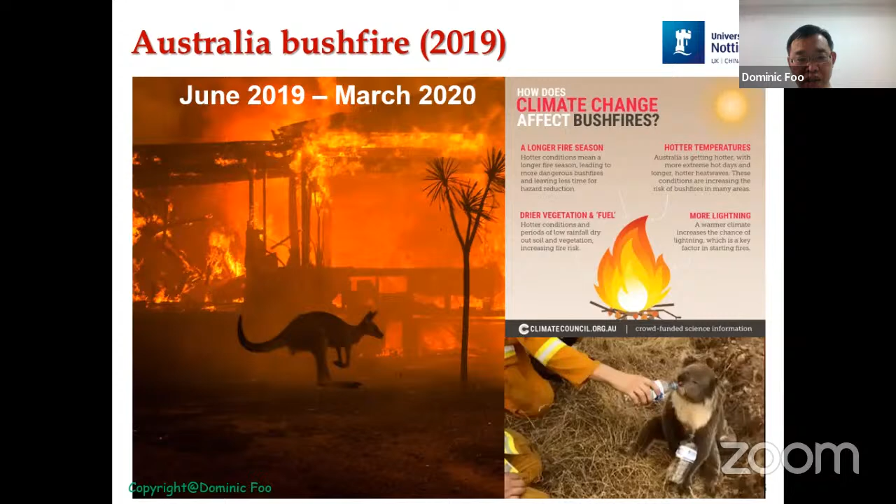The country that is not too far from us, Australia, encountered some bushfires in recent years. Bushfire is not something rare in Australia, it's quite common. The only thing is that in the last 3 years, their bushfires are getting more and more serious and covering more land area. For instance, in 2019, about 46 million acres of land burned, destroying more than 3,000 homes and more than 30 people died.

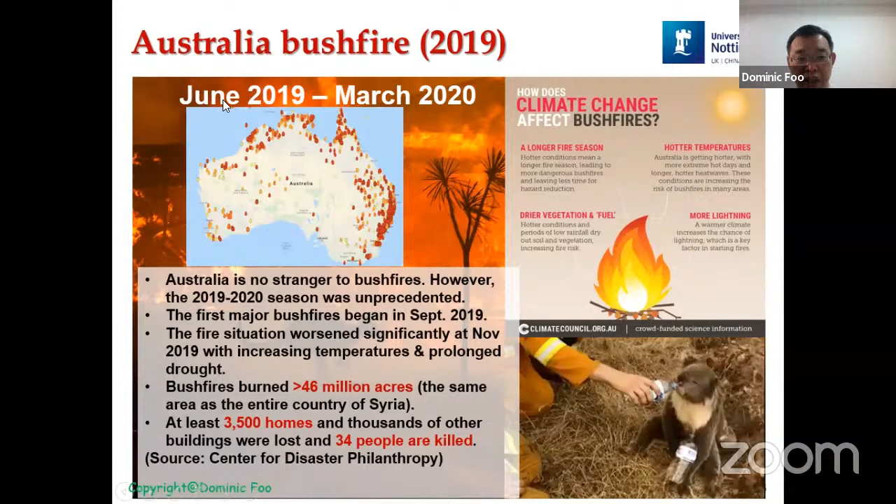It lasts for quite a long time, you can see the duration. Eventually the fire was put off because of heavy rain, but once they put off the fire, the rain causes a flood. You probably also realize that different parts of Australia are facing flood problems in the past 2-3 years, getting more serious.

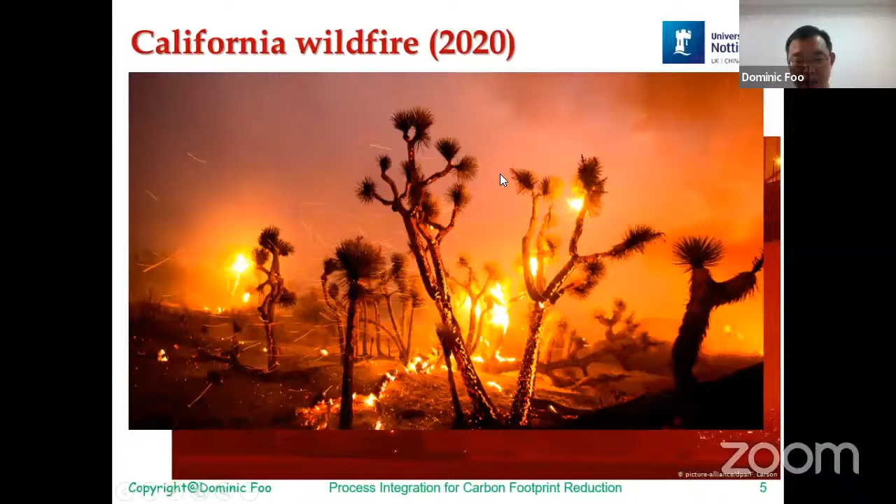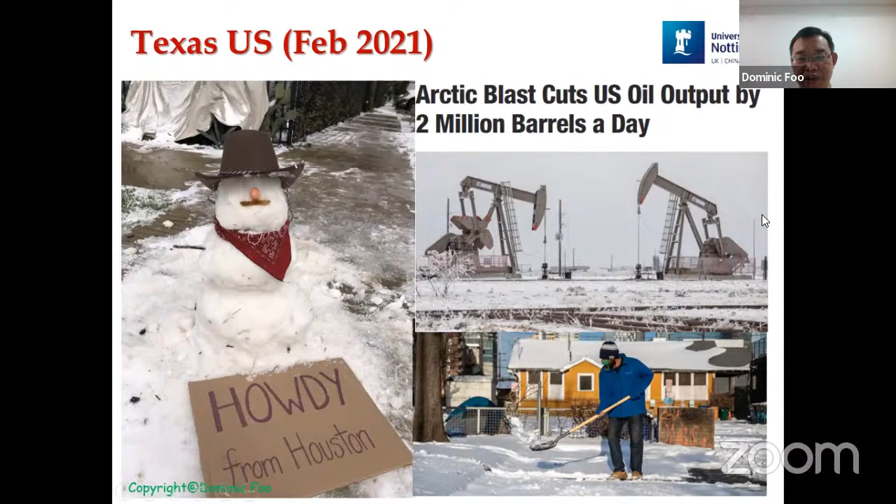In different parts of the United States, in the north they have bushfire, in the south they have Arctic blast. If you remember, last year during the world lockdown during COVID, they encountered a double sort of issue, because when a hot place like Texas suddenly got hit by snow, all the pipelines broke because they were not designed to encounter very, very cold weather. So water pipelines broke because ice froze, and they also had a shortage of oil because of some blockage of pipelines as well.

You can expect that temperature during the dry season becomes hotter and rain becomes heavier, and this is going to be very frequent. He actually stated this 4 years back, however, we get to experience it now and then, every now and then.

For instance, some of this, more than 100 mm of downpour, occurs within an hour. Some of those only 45 minutes. So back then we also had heavy downpours, but usually less in terms of volume and dragging a longer time. Now it looks like the heavy downpour comes in with a large volume in a very short time frame, so whatever drainage system you design will not be able to cater to this kind of sudden change in weather.

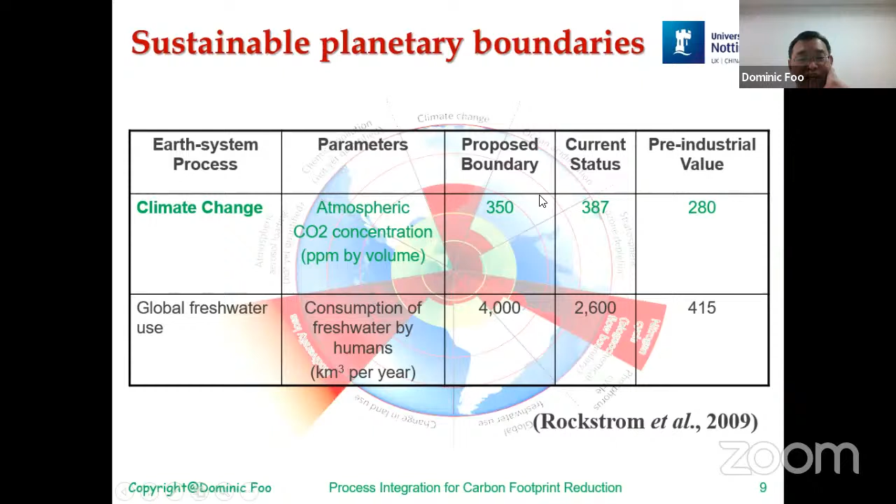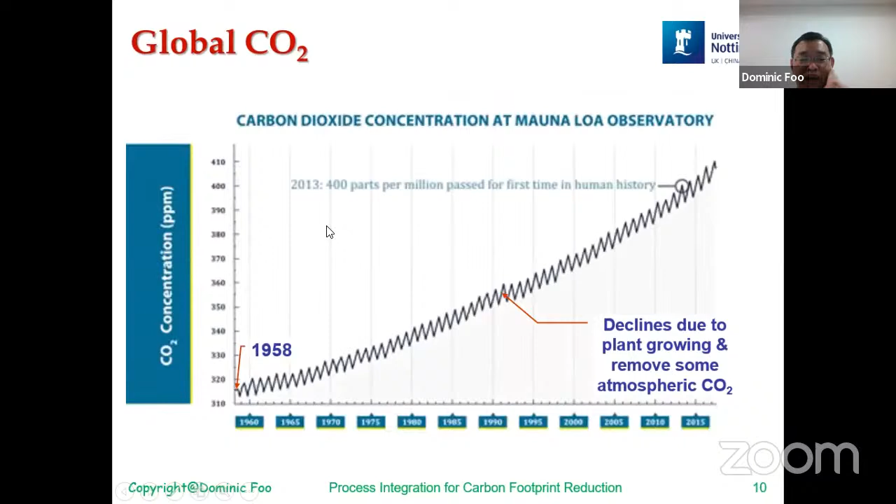However, when they published the paper in 2009, the value was already 387, already exceeded. But you don't see that kind of extreme weather a decade ago. Only in recent years do you see this, because all these effects are actually delayed. When they say the proposed boundary is 350, you know what are we now? Some years ago, we already surpassed the 400 ppm threshold. This was in 2013, where the 400 parts per million threshold was bypassed. They proposed 350, but by 2013 it was already 400.

I captured this picture a month ago. It was reported at 417 two months ago. I'm sure now it's higher than this value, probably 418 or 419. By the way, it fluctuates every year because of the spring and winter situation in the northern hemisphere, which causes the flora to absorb more CO2 in one season and less in winter. But overall, you can see the trend has been climbing.

This is known as the Keeling curve, named after the scientist who installed the measuring device in Hawaii back in the 1950s, when nobody thought CO2 could be a culprit for climate change. He installed the device many years ago and monitored it until he passed away.

So you can see that the overall trend is increasing. People always say that whatever year is the hottest year, but actually there's no hottest year. There's always hotter and hotter in the future.

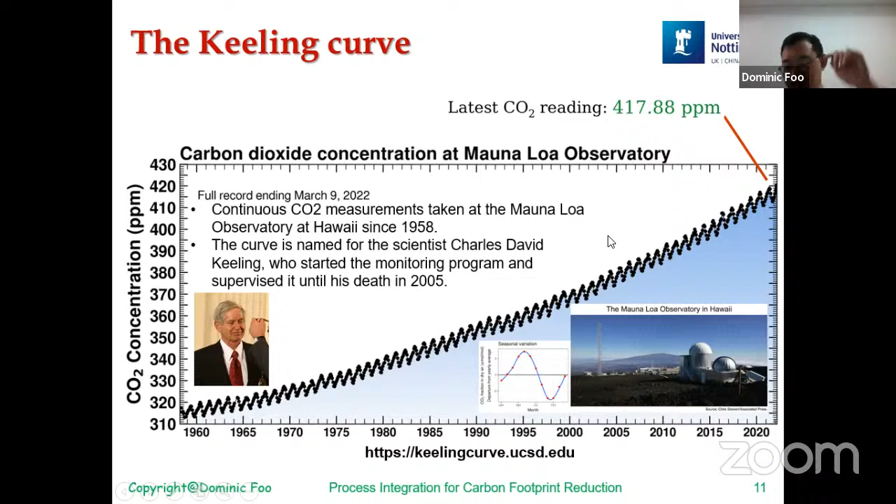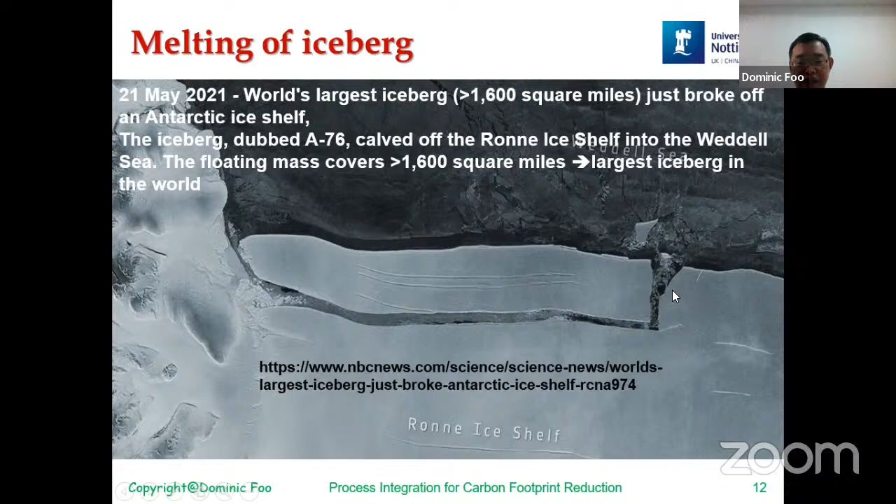So of course some of these things happen, like the melting of ice. This was a picture taken last year of the largest world iceberg that broke off from the Antarctic ice shelf. You can do a Google search and find all this. This was a picture taken when it broke off, I think a month or two later, something like that.

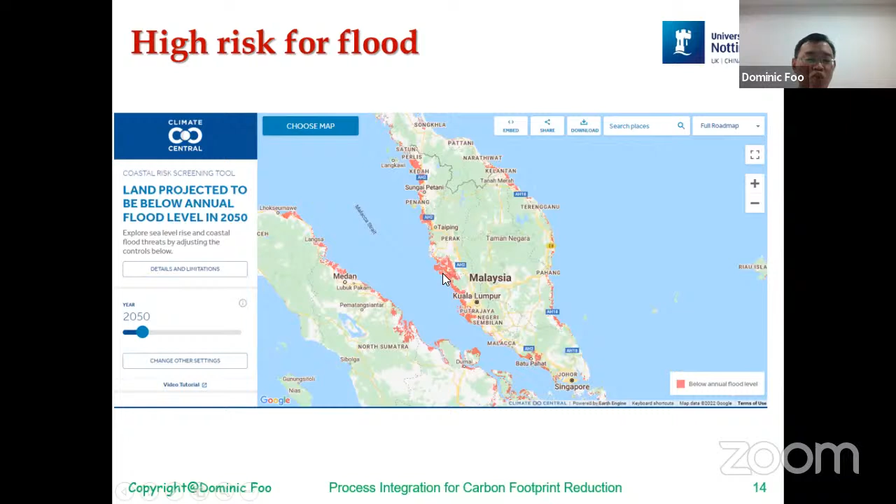In fact, in Malaysia, we also encounter reports saying that a lot of the coastal areas, in the peninsula especially, are the more serious places. You can see that all the red dots are regions which will eventually be flooded with water in 2050. In the next 10 to 20 years, you are going to experience more and more flooding.

Some experts say you're going to expect flooding at least once a year. Last year people were saying that COVID would help reduce CO2. Yes, it does, but not much actually, because global CO2 fell only 6.4% in 2020 when the whole world locked down and stopped all activities. We need much more than that to achieve climate change reversal — the world needs to cut 7.6% per year in order to keep global warming not higher than 1.5 Celsius.

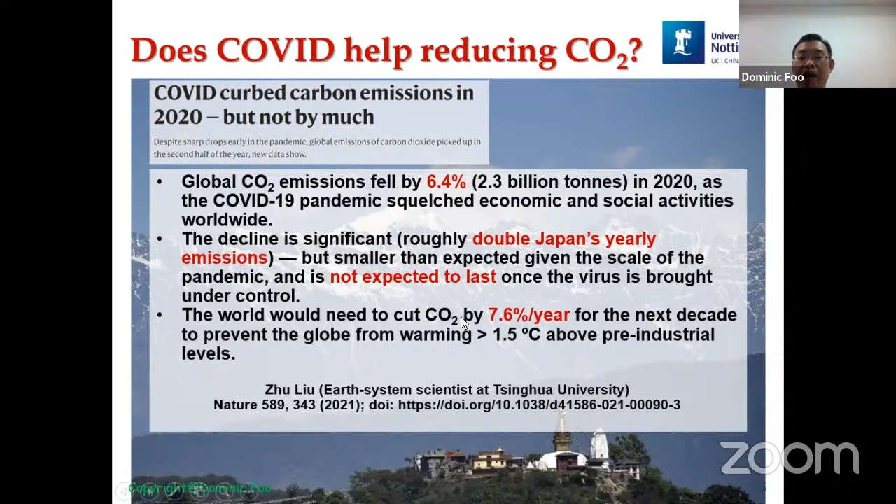By the way, the picture in the background shows the Himalayas during the lockdown. You can see the Himalayas with the naked eye, because normally you wouldn't be able to see them due to dust blocking the view. These are reports by scientists saying that this level of change will have to happen every year — but that would require a lockdown every year. You see, this was a global lockdown, and it does help reduce CO2, but as I said, not sufficient.

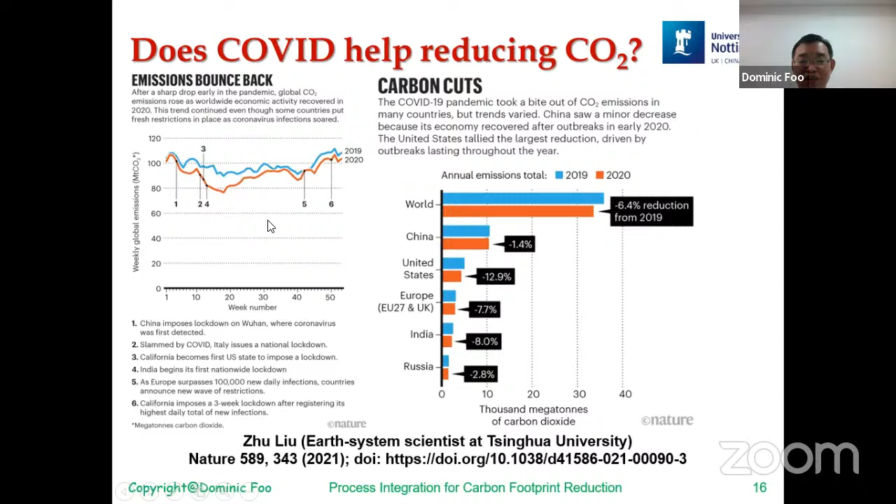We need something more drastic in a post-COVID world, because we are now ramping up everything — economic growth and all this, and usually economic growth is associated with energy use. The more energy you use, the more CO2 comes out, and we need something called technology wedges, where future and current technologies are implemented in order to cut down CO2.

We are here already, trying to achieve the 2050 target, where many countries have announced carbon neutral goals. If possible, we want to increase the use of renewables, start switching to cleaner electricity, improve electricity efficiency, and all this should come into the picture. Of course, a lot of people are also talking about carbon capture.

As of now, there are only 2 or 3 big scale CCS plants running, and many others are in demo or pilot scale kind of transition period. So still yet to be in large scale implementation.

This is another new technology, we call it negative emission technology. People started talking about it 10 years ago, but it's still in the research stage, I would say, still not there yet. So we can only rely on some of those technologies in the middle here, trying to make use of these techniques.

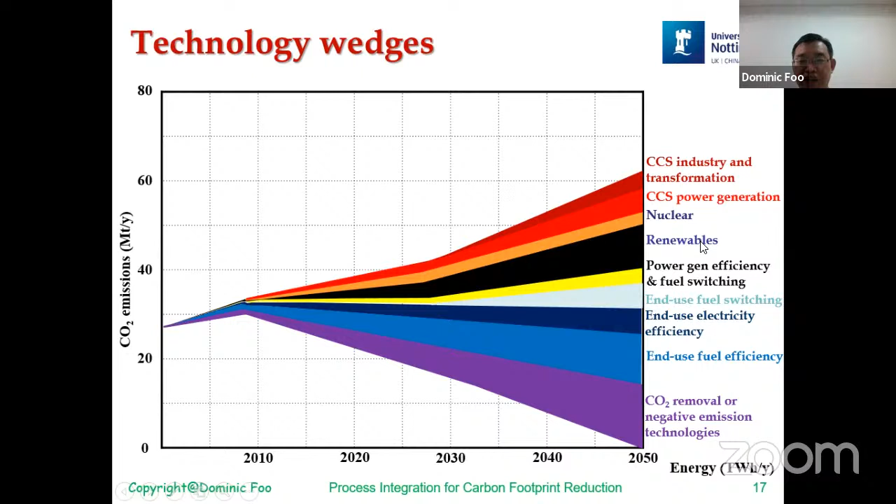The United Nations released the Sustainable Development Goals in 2015, in which some of these things are highlighted. Goal 7 says we need to produce available and affordable clean energy for everyone to use, and Goal 13 talks about climate change, in which CO2 needs to be removed from Mother Earth in order to keep the temperature rise below 2 Celsius.

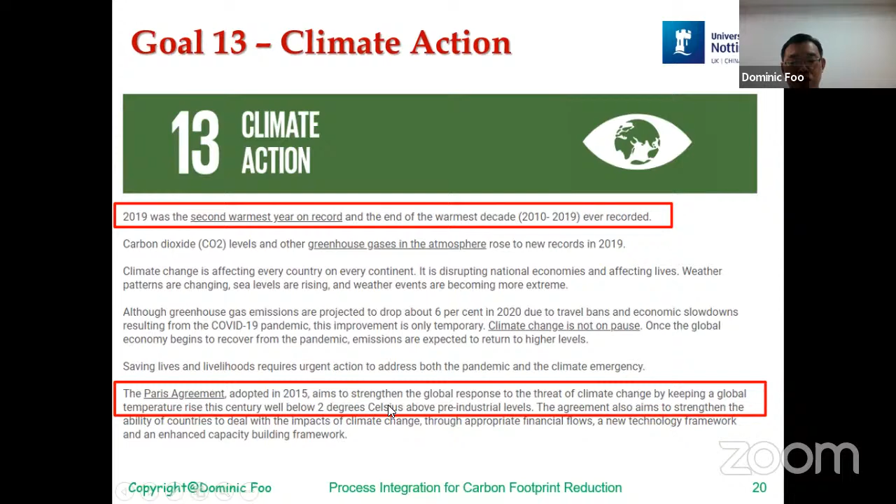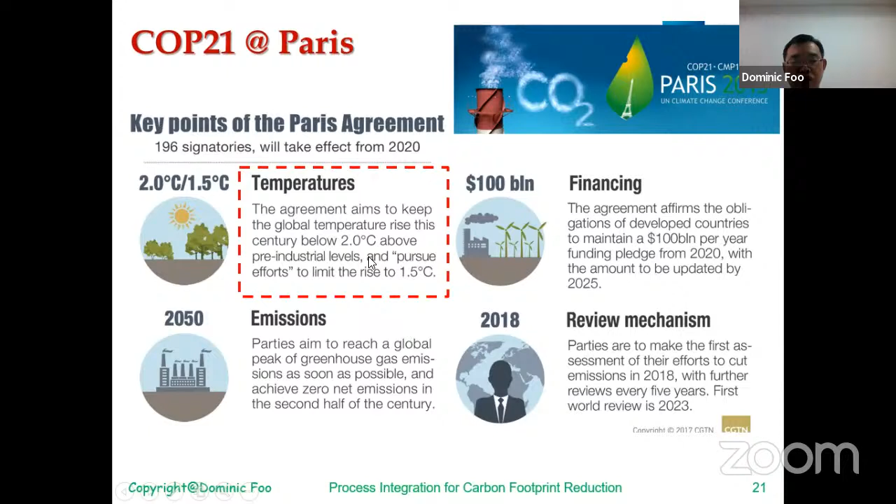Why 2 Celsius? Because 2015 was the year they signed the Paris Agreement, which aims to keep the global temperature rise below 2 Celsius above pre-industrial level, and pursue an effort to limit it to 1.5.

This was followed up in Glasgow at COP26, November 2021, where they again reassured that we want to have the 1.5 Celsius growth limit, if possible, try to keep it at 1.5. That is the eventual target.

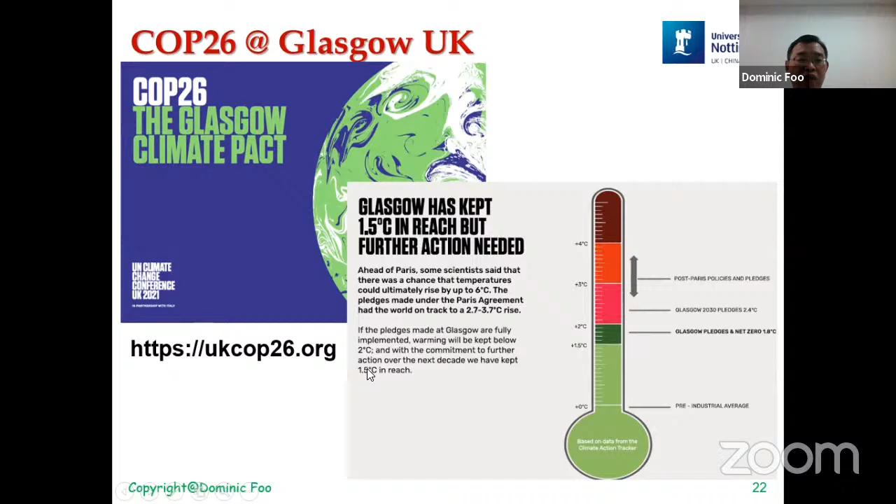Meaning that we should only allow the temperature of Mother Earth to rise no higher than 1.5 if possible. In the industry that I serve, the chemical industry, we actually consume a lot of energy, predominantly fossil energy - coal and natural gas. All these are fossil energy that produce CO2, whether you like it or not.

The technique I'm going to introduce to you, how we can cut carbon footprint, is called process integration. It was introduced back in the 70s for heat recovery systems.

Back then, this was during the first oil crisis of the world, and this technique was proposed by some important technology developers. Back in the 1970s, it was meant to reduce energy usage, and nowadays for us, reducing energy usage also means reduction of CO2 - that means carbon footprint reduction.

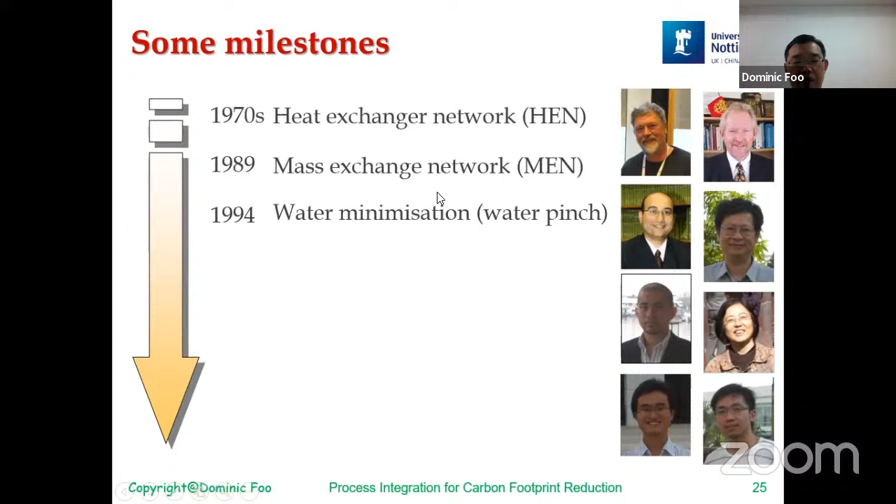Throughout the years, in the last 40 years, these techniques have been extended to address things like solvent recovery, water recovery, optimization for production supply chains, hydrogen integration, and eventually CO2 optimization.

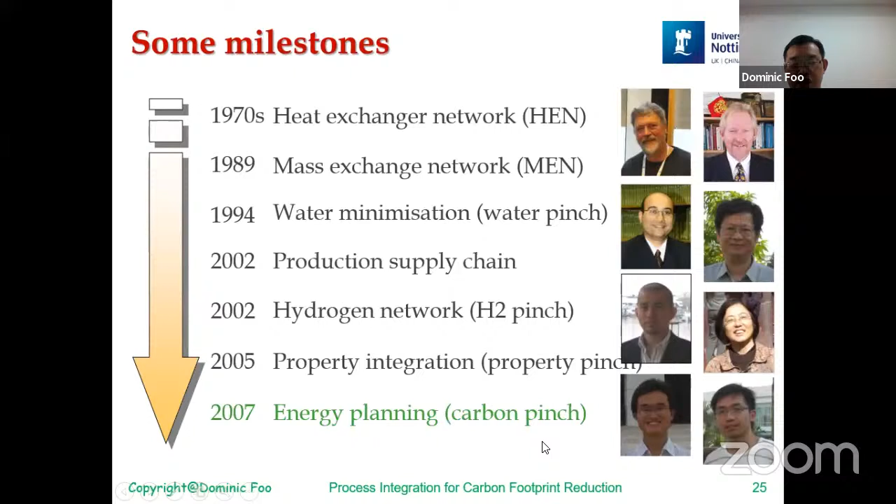For those trained in chemical engineering or mechanical engineering, some of these diagrams are not alien to you. This is the heat recovery system where hot streams can be used to recover energy to cold streams. From there, we can identify how much hot utility is needed, how much cold utility is needed. The minimum hot utility corresponds to minimum CO2, and maximum recovery corresponds to

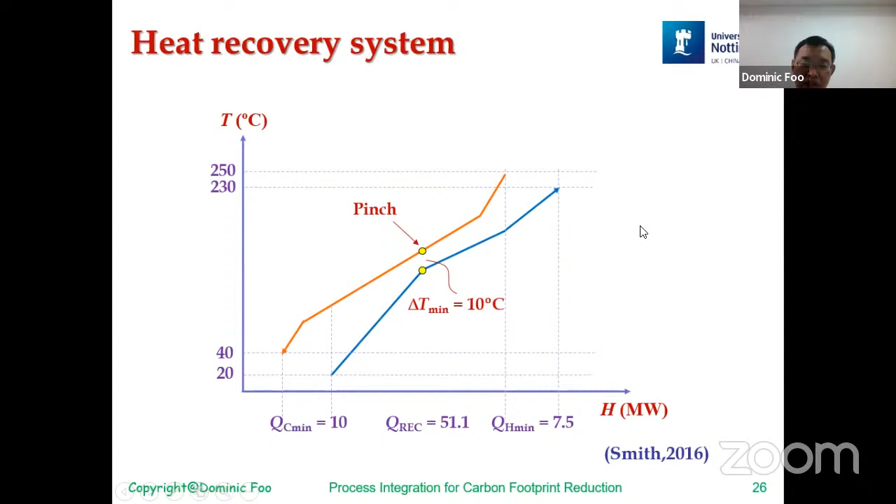Let me move on to talk about carbon footprint, which is the main topic for discussion. All the products that we make - be it water bottles, the clothes you wear, the gadgets you use, the computers used now - all of this contains some carbon footprint, whether you like it or not.

When we produce it in our factory or plant, we embed our carbon footprint through our raw material, our power supply, and our steam. Some of these are external things - for example, raw material is always external.

Electricity usage, obviously we buy it from the utility supplier, and steam you usually generate yourself after purchasing fossil fuels from your supplier. So if you generate steam yourself, this is an internal carbon footprint you add to your product. And if you purchase something from outside, like electricity or raw material, these are external carbon footprint. So all this footprint goes into the product, and you sell it to your consumer.

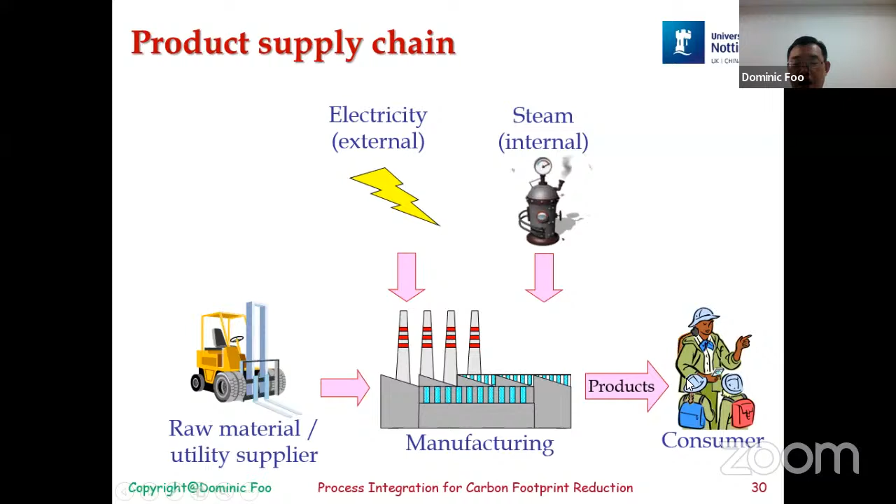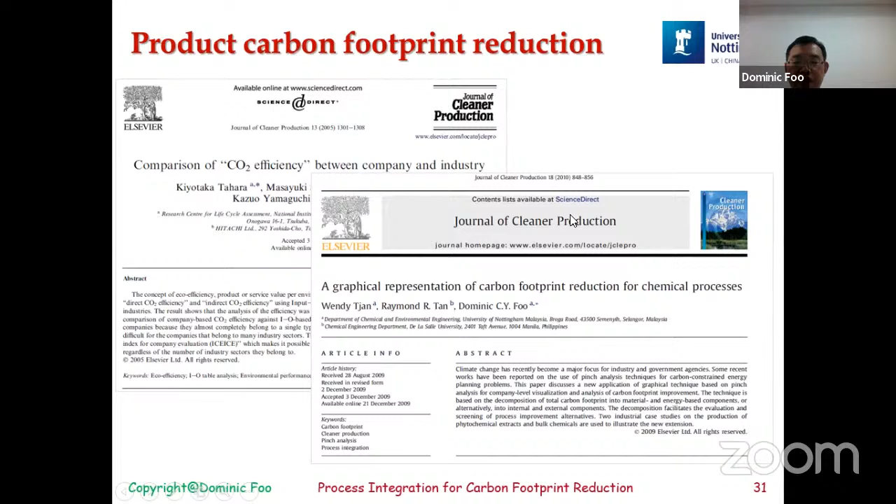A decade ago, we proposed a method. This was not new—at that time, people didn't even talk about carbon footprint. This method was already being proposed and already out there, and some companies are using it.

What it does is ask you to plot a simple diagram, CO2 emission on the y-axis and economics on the x-axis. These economics are basically the costs that you add to your product. For example, you have a raw material purchased from your supplier—that's the cost for raw material—and you're also generating steam for usage. That adds value to your product, and every value you add, you're adding CO2 emission, whether you like it or not. This carbon footprint can be divided into internal and external, as I mentioned earlier.

In other words, your raw material and power supply are the external—you are also adding CO2, but it's not so high in terms of intensity per dollar and cent compared to the internal that you add. So when your situation has a higher internal footprint, we need to do something about the internal footprint, trying to reduce this in order to meet our target.

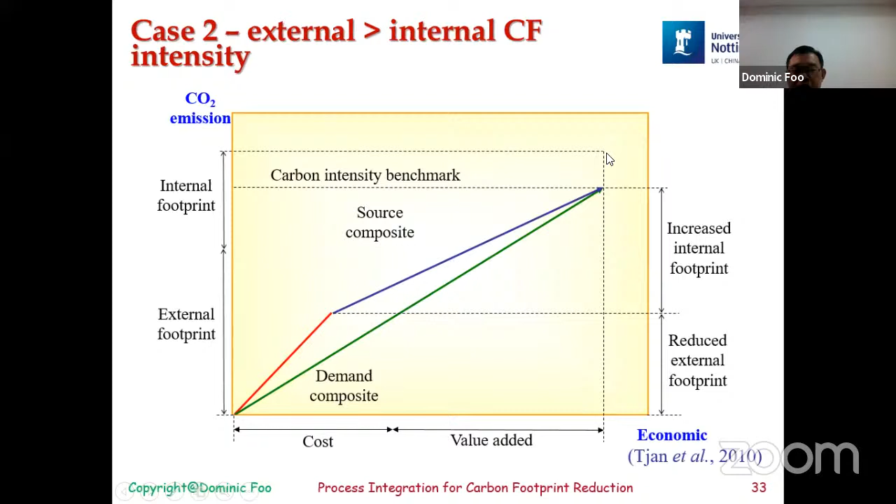This is the case where external footprint has high intensity—we have to cut it down so the overall footprint can be reduced. I'm going to show you two case studies in a very superficial way, hoping for you to roughly capture the idea.

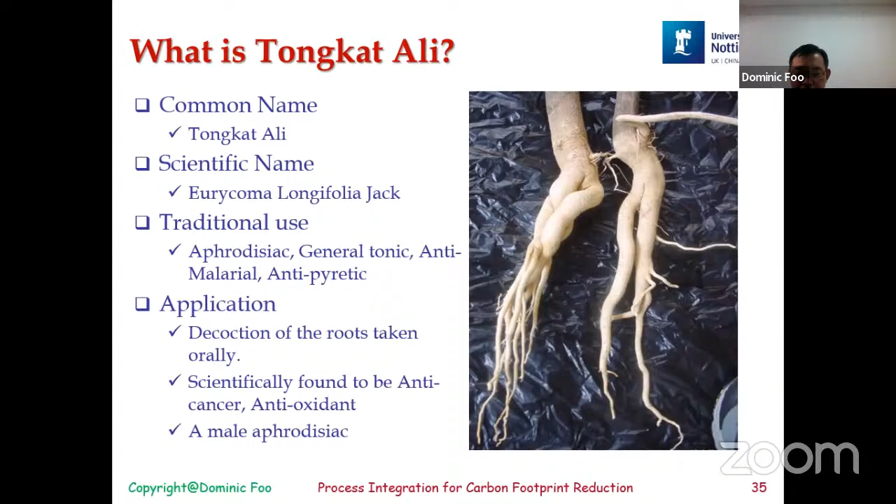This is a case where a product called tongkat ali is made. Okay, I believe most Malaysians will know what tongkat ali is. In the process plant, they will put the tongkat ali in the extractor and then put in the deionized water, cook it for 2 hours within a pressurized vessel that operates at 2 bar.

After that, they will send it to a tank and then to be spray dried. So this final product is a dehydrated extract in a powder form. Okay, very, very bitter. Once you spray dry it, it becomes... oh, by the way, after you extract it, it's a yellowish liquid.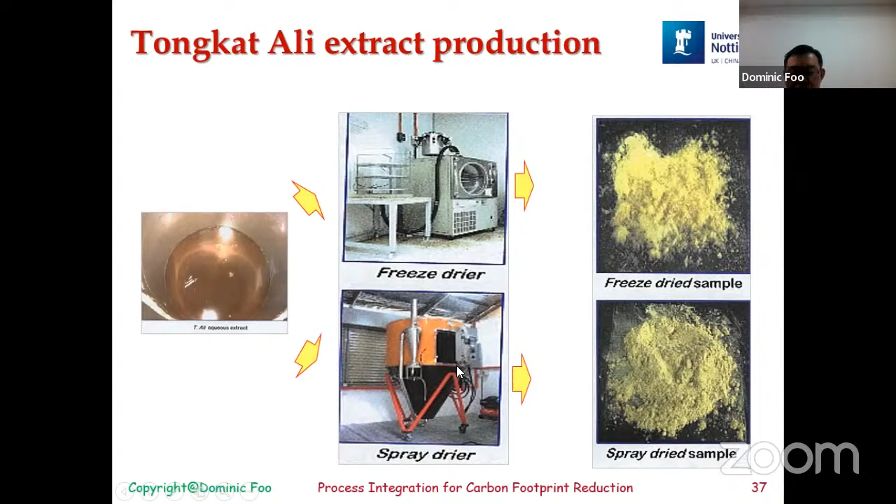Very, very concentrated. This is very bitter. Even if you just walk into the room, you can feel the bitterness at your throat. Okay, that's the extractor, that's the spray dryer. Once you collected the spray dried powder from the vessel, then you can pack it, and then it goes through some operations or packaging, and then eventually you can sell this product to the clients.

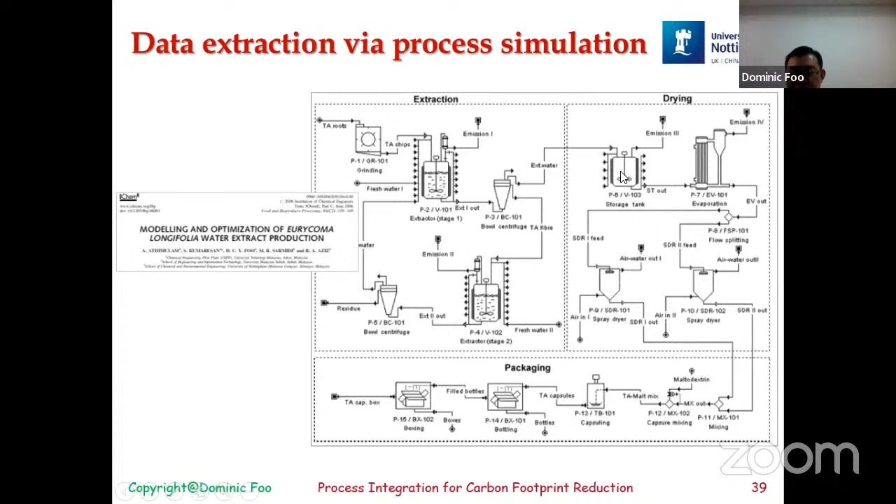Okay, this is a model that we built in order to obtain the mass balance: how much Tongkat Ali is coming in here, how much fresh water we put in here, and we need some evaporator and spray dryer and some packaging machine to get the final product.

Now, what we need to do, based from the analysis, we capture all the feedstock needed. We need water, chilled water, maltodextrin, Tongkat Ali root chips, bottle boxes, and from there we calculate the costs to make such a product.

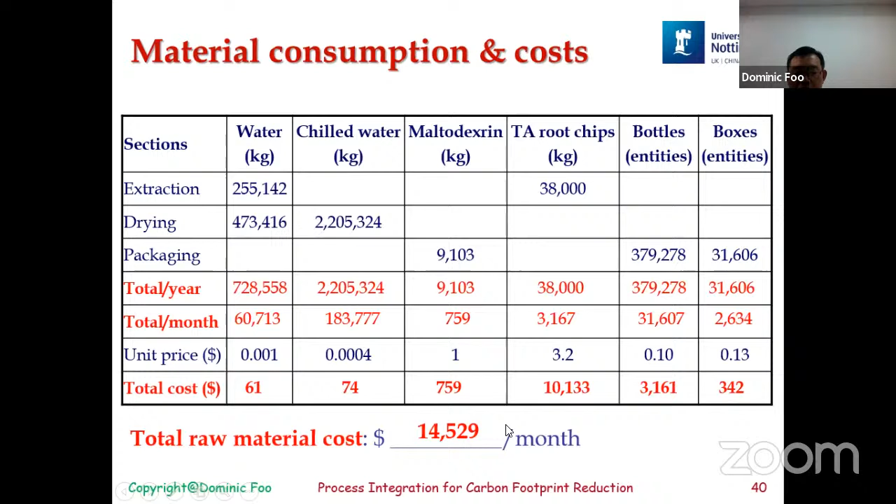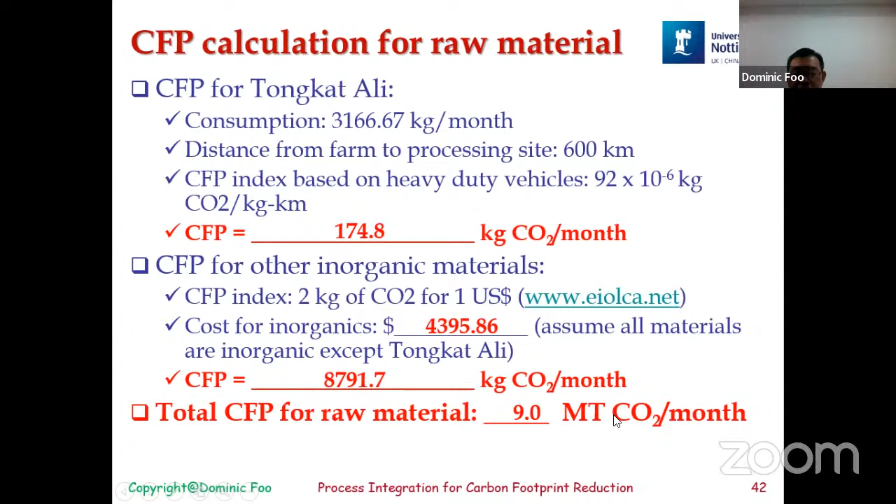Let's say this is 14,500 material costs per month, and we then calculate the electricity and steam costs. That gives us the cost for electricity. With the steam and electricity, we can also calculate the carbon footprint for the different materials. Eventually, we know that this particular production plant, every month they are releasing about 9 metric tons of CO2. And the energy footprint is calculated based on the electricity.

Electricity mix - this is the power mix in Malaysia. 10 years ago when we did the analysis, our power mix in Malaysia is 50% natural gas, 35% coal, hydropower is 14%, and oil is 1%.

Nowadays it's slightly different because we have more renewable. So, but with this percentage based on the intensity, you can actually calculate the carbon footprint of the power generated in Malaysia. Nowadays, I would say this is cleaner because we have a bit more solar power and renewable also coming in. So this is cleaner nowadays.

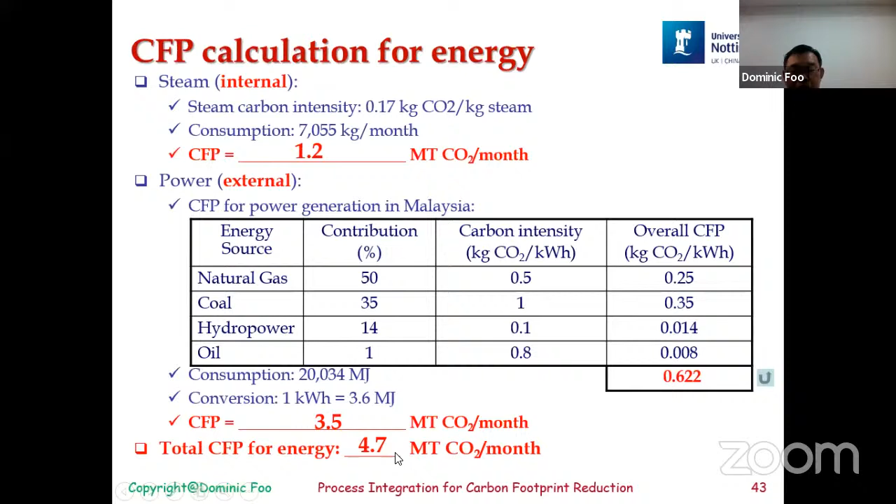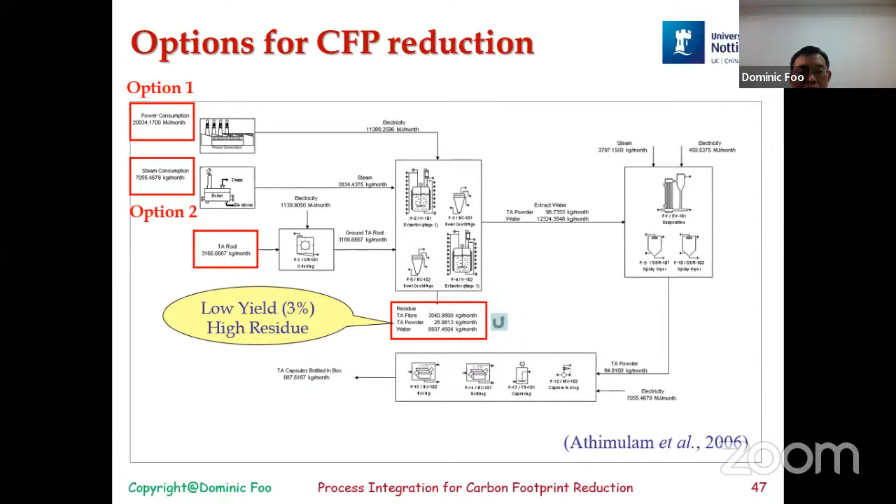If I generate power, meaning that I buy less electricity from outside. If I generate steam, I will be able to reduce my fuel oil that we use to generate steam in the first place. So both of these are possible, and we'll look at the economic part to see which one is a better solution.

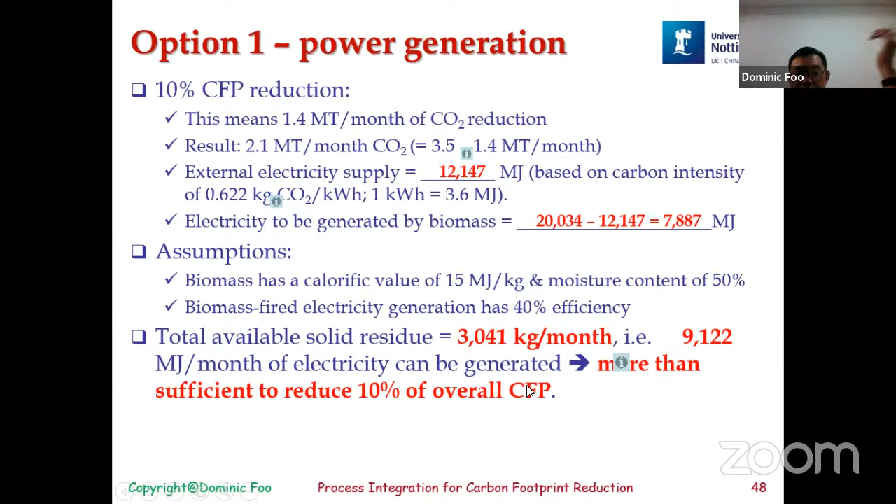We do a simple analysis for power generation. If you carry out the analysis, you will see that CO2 reduction wise, we can actually reduce the CO2 by more than 10%, more than sufficient to reduce 10% of the overall carbon footprint. The only problem is you will have to buy a new power generator. The investment is not cheap. In terms of carbon footprint, it can achieve more than 10%, close to 11%. But investment is high because you will have to invest in a new power generator.

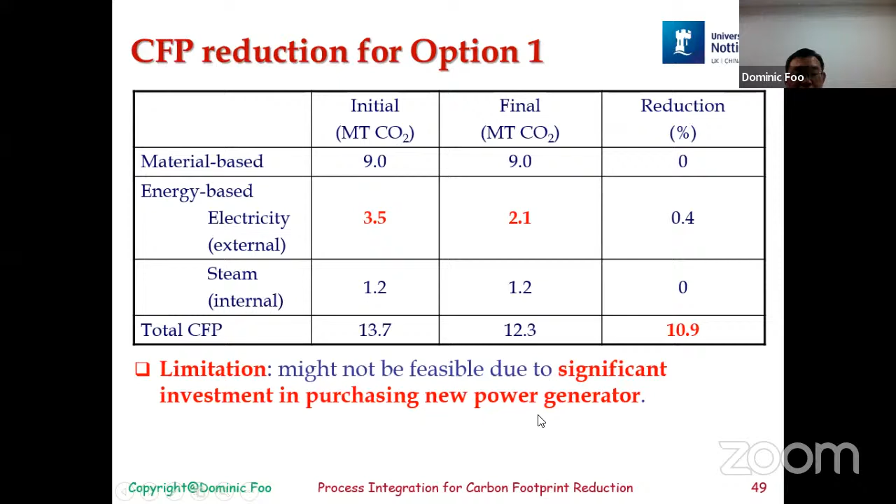Because the plant originally is just buying power from outside, they don't have a power generator. You have to buy a new one. It's not cheap. That's a lot of investment.

Option two, if we were to generate steam, what we need to do is put the fiber into a dryer. Of course we can put it under the sun, as long as it's not raining, it's fine. Or you can also purchase a tray dryer to dry it first, then only you put it into a boiler. The boiler can generate steam usage to be used for the plant. At the moment, they have a boiler, and they are generating the steam using fuel oil.

And if we want to make use of the fiber, we have to make sure the fiber is small enough in the first place. Number two, we need to dry it because it is quite wet, about 50% moisture content. It's very, very wet. We have to dry it before we can put it into the boiler. And of course you will argue that if you dry it using a tray dryer, this is also releasing CO2. Yeah, right.

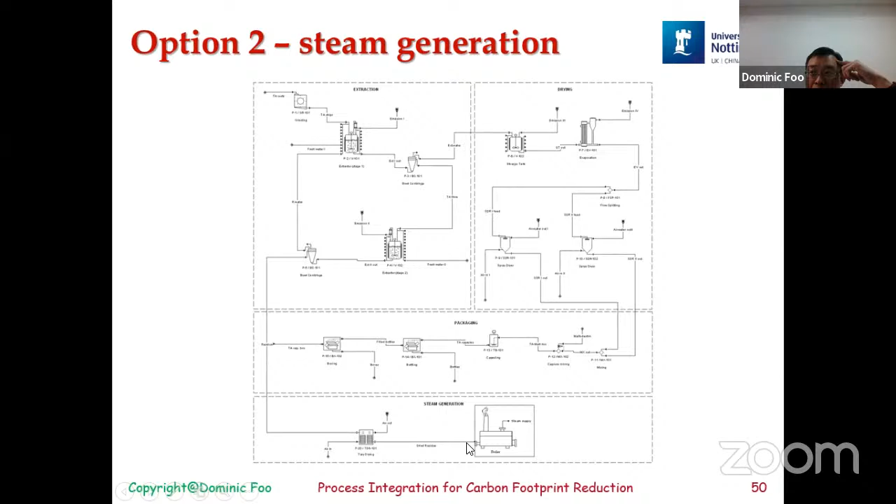Okay, so we need to look at it carefully to see how much reduction is there. If you can make use of the fiber, that actually cuts down the external fuel consumption, because they are buying fuel oil from an external party to generate steam. If you use fiber, you can do some calculation, assuming the heat content of the fiber and an efficiency of about 70%.

Moisture content is about 50%. Because of the high wetness, 50% wetness, CO2 reduction is only about 9%. We won't be able to achieve 10%. But if this is something that is feasible, we can look into the details and do a bit more modification on the existing system to move forward with these options.

Technically this is a more viable option compared to power generation, so the clients actually feel like implementing this. We leave them to do the job.

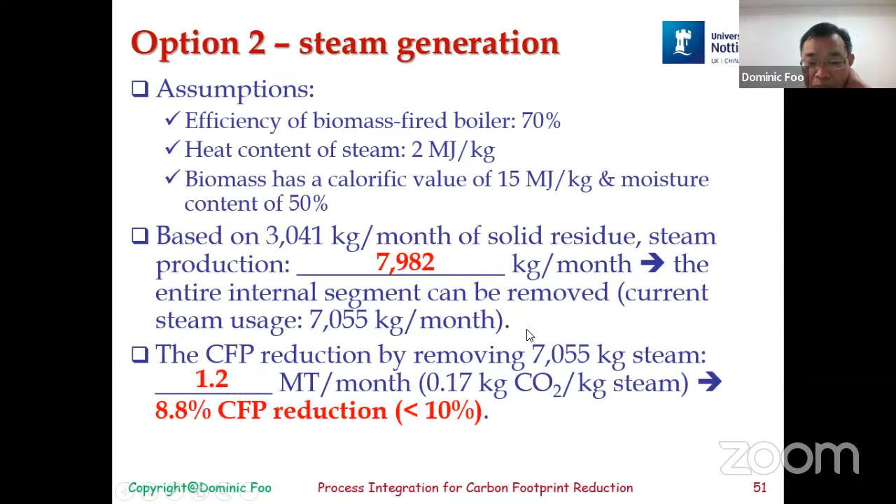I have some time, let me share with you a second case study. This was based on a plant in the northern part of Malaysia. This plant produces chlor-alkali products. They are using salts, and they imported the salt from Australia, passing through some processes.

The main process in the plant is the electrolyzer. They put in the salt and then put in demineralized water, making the salt become salt water, and then pass it through the electrolyzer that produces NaOH, sodium hydroxide, and some chlorine gases that will be sent to the hypo tower and HCl burner to produce other products.

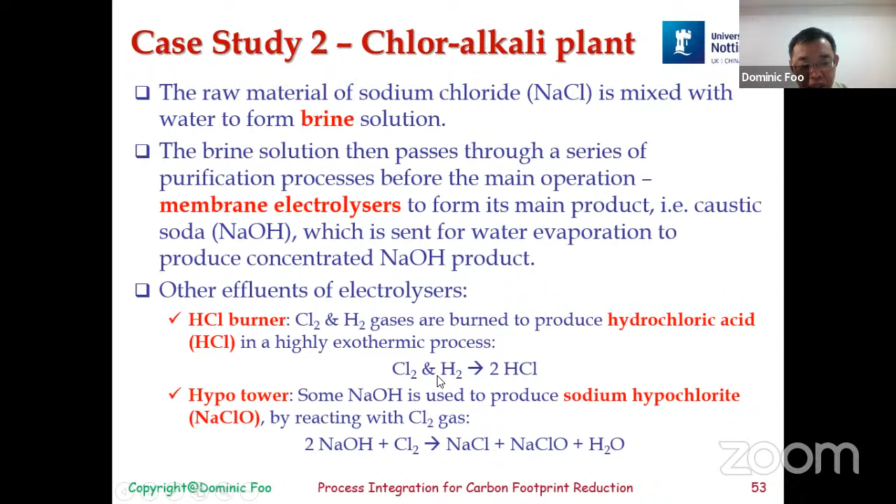Now, for this particular plant, the electrolyzer is the main power consumer. It consumes about 90% of the electricity, and the reaction is given here. This is what happens in the electrolyzer: chlorine gas, hydrogen, and sodium hydroxide are the main products coming out of the plant.

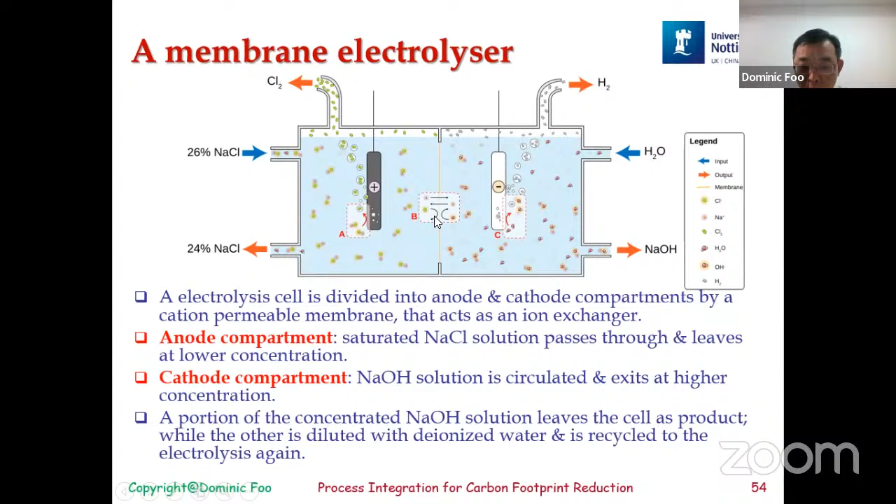Because the electrolyzers are quite old, their power consumption is actually very, very high. If you do the analysis for their carbon footprint diagram, you can see that material is not too bad, even though I mentioned they imported the salts from Australia. The reason was that the seawater in Australia is actually cleaner in terms of less unwanted mineral content, so they have to import the salt from Australia.

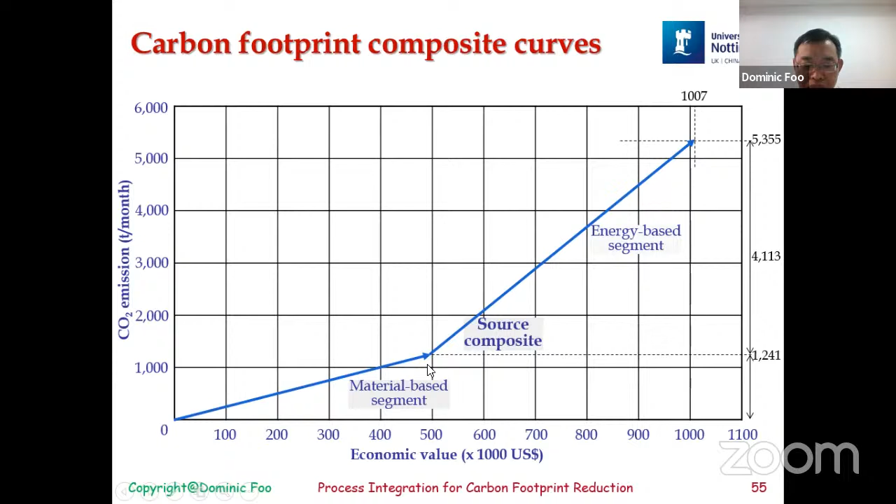So when you import the salt from Australia using sea transport, that releases some CO2 as well. But still, it is much less than the energy portion, because they use a lot of power in the plant.

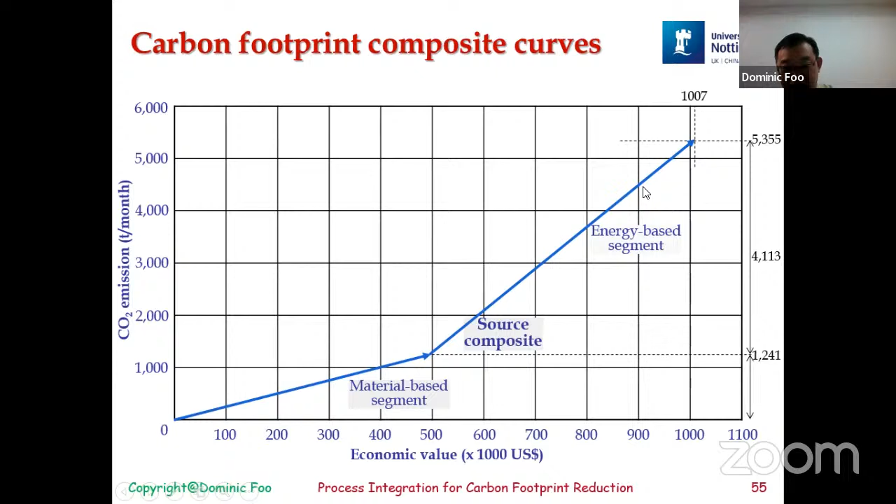For the electrolyzer, if they want to reduce 10%, that 10% is based on the total of 5,000 over, for the total CO2 footprint. 10% also means that they need to cut down 500 over every month, and we then see that the energy portion is the main culprit.

Relooking at the energy portion, you can then see that the electricity is mainly consumed by the electrolyzer. So if I want to implement a 10% reduction, that also means we need to cut down the carbon footprint for the energy portion by about this much - 500 over, that has to reduce down to 3,600.

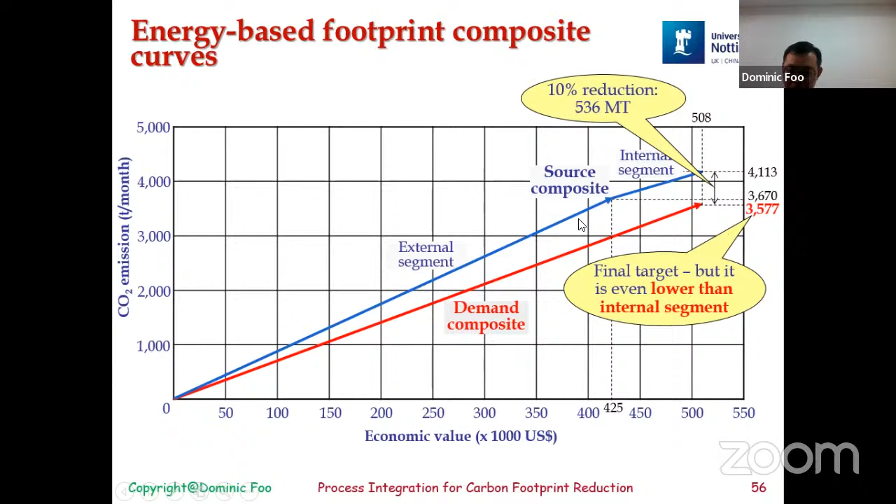That's our target. However, it may not be that easily implemented because the internal segment is this, the external segment is this. If you want to reduce down lower to this value, it's actually even lower than the internal segment, which also means we have to cut down the electricity footprint as well.

So in this particular case, we propose a dual approach. Number one, we have to reduce the slope of the internal segment - this internal segment that you see here, we will have to reduce the slope. Reducing the slope also means that per dollar and cent, we release less CO2, hoping that when the slope is lower, we release less CO2.

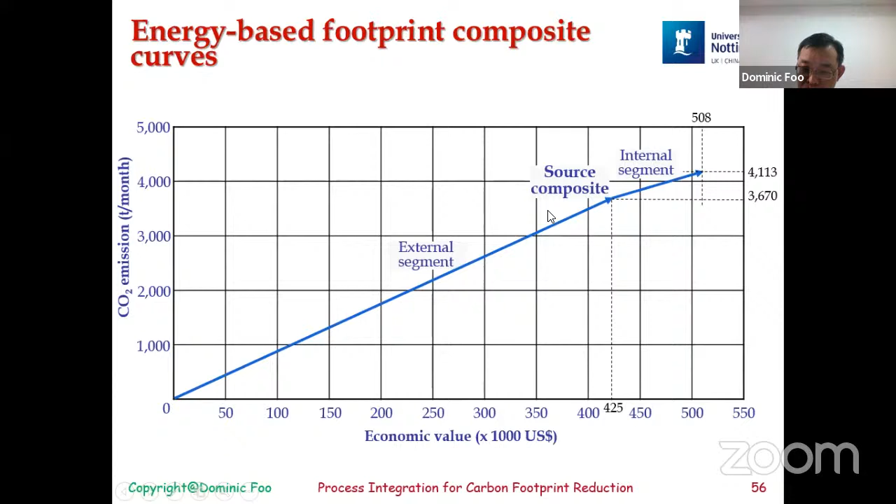However, if the target is here, reducing the slope alone is insufficient. We also need to cut down the external carbon footprint. So option one, we reduce the slope of the internal segment by using some cleaner energy, producing steam from the HCl burner. Their current equipment makes this not possible because it's a very old burner.

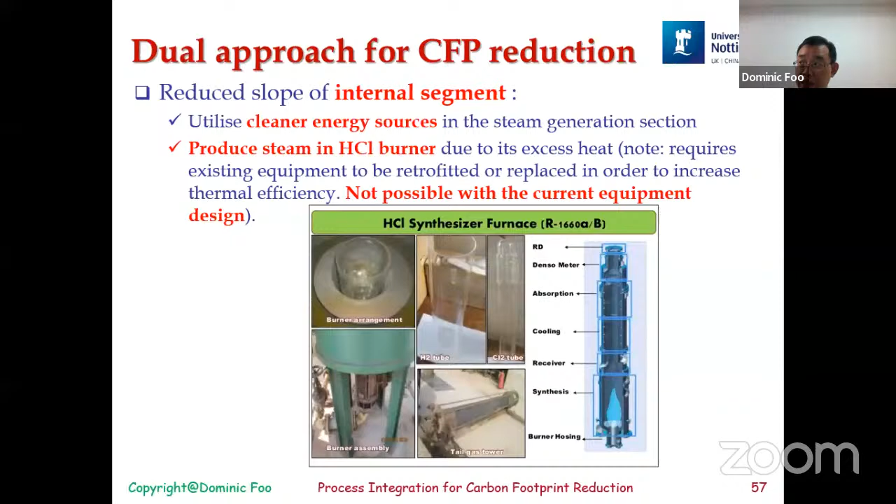The moment you pass by, you can feel the heat, which means the energy is not being preserved. If reducing the internal segment alone is not sufficient, we have to also deal with the external segment reduction simultaneously. One option is to replace the electrolytic cell - the plant has been operating, I think, for more than 40 years.

Some of the cells are very, very old, and it's really not efficient. You can see the picture below. What we can do is to slowly phase out some of the old cells by investing in new cells.

The plant authority has thought about it, because in the long term, when the electricity bill gets higher and higher, maybe it's a better option to just replace some of the old cells. At the same time, we reduce electricity, and that also helps us reduce CO2. Of course, there will be capital cost investment.

In some countries where there are options to pursue green electricity, they can look for options to buy electricity from clean energy producers. Unfortunately, not for Malaysia. So there are also options that we can put solar cells on the rooftop. If you can put solar cells on the rooftop, that can also help you generate green electricity. Those are options that we can pursue.

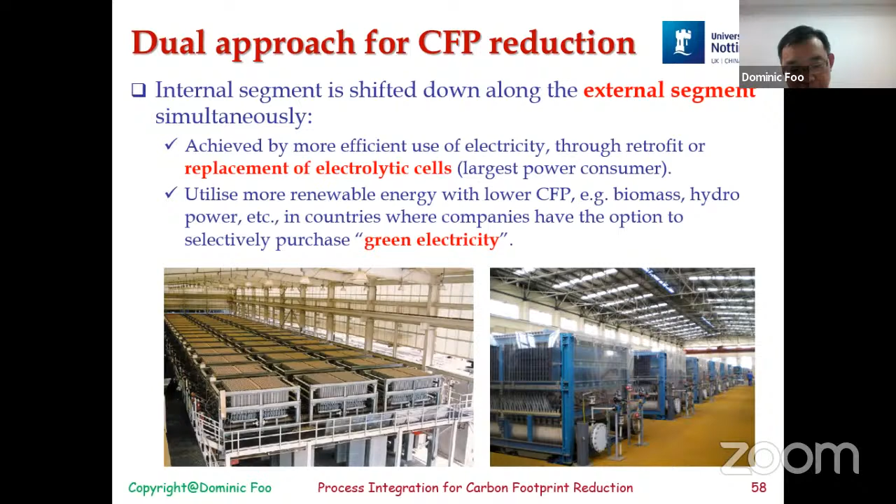Again, if you want to put solar cells, money is needed. Investment is needed. If we implement the two options, reducing the internal footprint will reduce the slope and cut down the external footprint a bit. Meaning that we will not buy so much electricity by changing some of the electrolytic cells. That will cut down power consumption, and you can see that if the external footprint can be cut down, this internal footprint has its slope reduced. That will help us achieve the targets we set now, about 10%.

Again, this is potentially doable. Whether to implement it or not, we leave it to the plant authority. They will have to decide whether such an investment is necessary, or whether they can get a loan from the bank for the HQ, or from whatever green financial scheme by the Malaysia Green Tech Corp. So those are options that we can consider.

Finally, I'll spend 5 minutes to talk to you about multi-product cases. The two case studies that I encountered are considered single product, meaning that if I can do the footprint reduction, it will have significant contribution to all my processes and products.

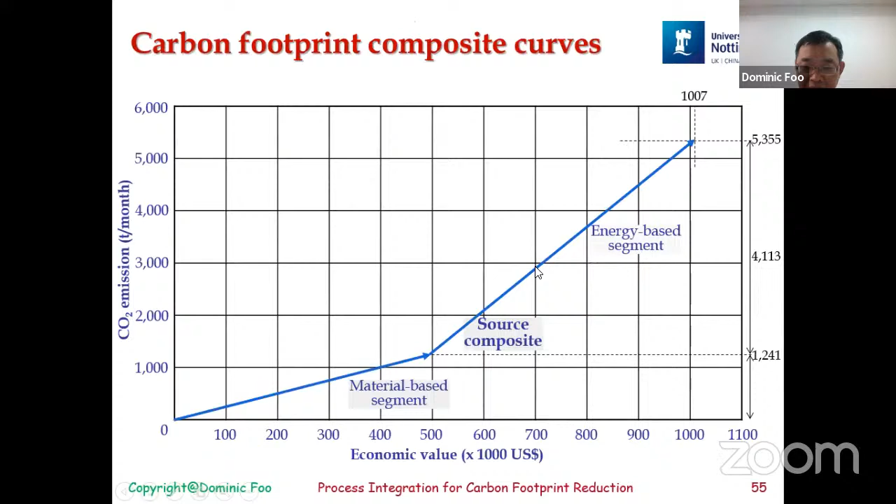For example, even the chlor-alkali plant, even though they produce 3 different products, they are all sharing similar facilities. If I can get better improvement of the electrolyzer, as long as I can improve its performance, I can cut down electricity consumption, which will benefit all different products coming out from there, because this is the main process that contributes to different products. So for this particular method, we consider this a single footprint reduction strategy.

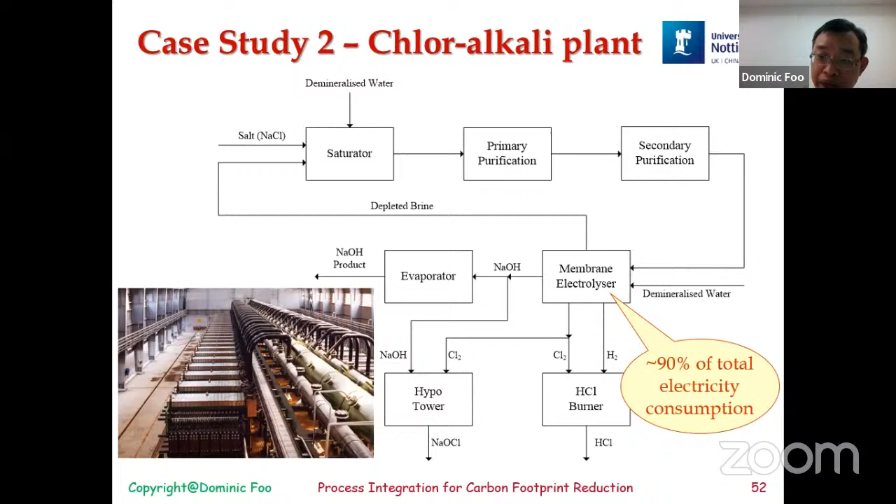There are some cases where this method may not work efficiently. For example, when you have a process where multiple products come out, we need a slightly modified method to cater for multiple processes. This paper is relatively new, about 2 years old.

Let me show you. For example, if you have 4 different processes producing product X and product Y, A and B are shared processes, meaning that any modification or retrofit you do here will affect both product X and Y. However, if you only modify process C, it will affect product X. If you do any modification on process D, it will affect product Y. These are dedicated processes.

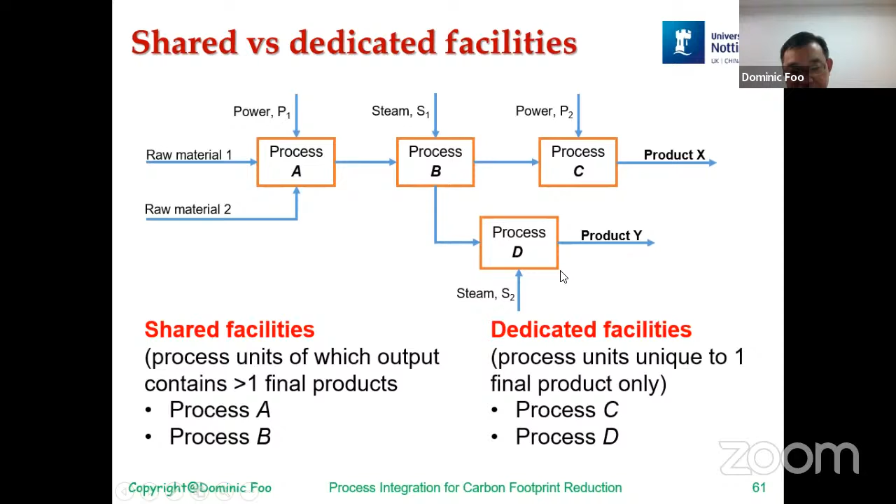We say A and B are shared facilities, C and D are dedicated facilities, because C only produces product X, D only produces product Y, and C and D have significantly higher CO2 emissions, meaning their carbon footprint is significantly higher compared to A and B. So it could be a case like this. Of course, this can have several strategies to deal with it. First, we look at whether the shared facility has a higher carbon footprint, or whether the dedicated facility has a higher carbon footprint—the strategy is different. For this case, the dedicated facility has a higher carbon footprint compared to the shared facility. If the shared facility has a higher carbon footprint, then it's quite obvious.

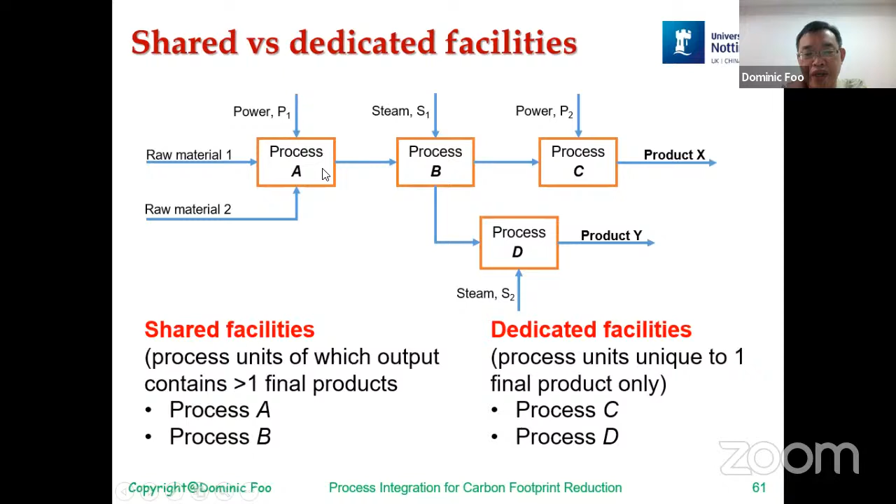For example, the shared facilities A and B have a very high carbon footprint. We will try to modify or improve A and B in order to reduce the carbon footprint. Say this was the original carbon footprint. If you can reduce it and make it smaller, you can reduce the overall footprint because C and D will be benefited.

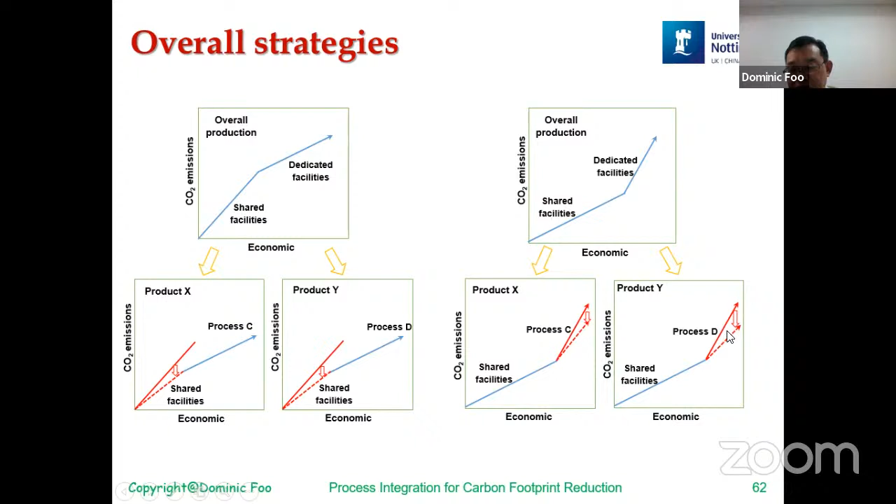However, if the dedicated facility has a very high footprint and the shared facility is lower, we will have to make sure we look at process C and process D in order to reduce the carbon footprint, because working on the shared facility may not help so much, since the intensity for processes C and D are higher. So these are the strategies we need to adopt.

I won't have too much time to go into the details. If you are interested, we can send you a paper to have a look. Of course, you can also join our workshop in the future.

For a concluding remark, I would say that when we try to reduce carbon footprint, it's important to look at the main contributors. If your contributors are the processes that are not efficient, improving the efficiency will help reduce the carbon footprint. We are looking for some systematic methods to address our work, and using the visualization method I've shown you does help us see which processes have a higher intensity of carbon footprint.

We go with this motto: big picture first, because any details that come later only make sense when you look at the hotspots and address the problem from the root cause.

If you look at the small details, like having 10 processes in the plant and going to inspect every single one, but out of the 10 processes, 8 of them are not the hotspots, the reduction is not significant. It's just wasting your time. Better to look at the hotspots that contribute the most. That's the main philosophy of this methodology: look at the hotspots, the ones that give you the highest intensity. Those are the processes you need to work on in order to reduce the carbon footprint.

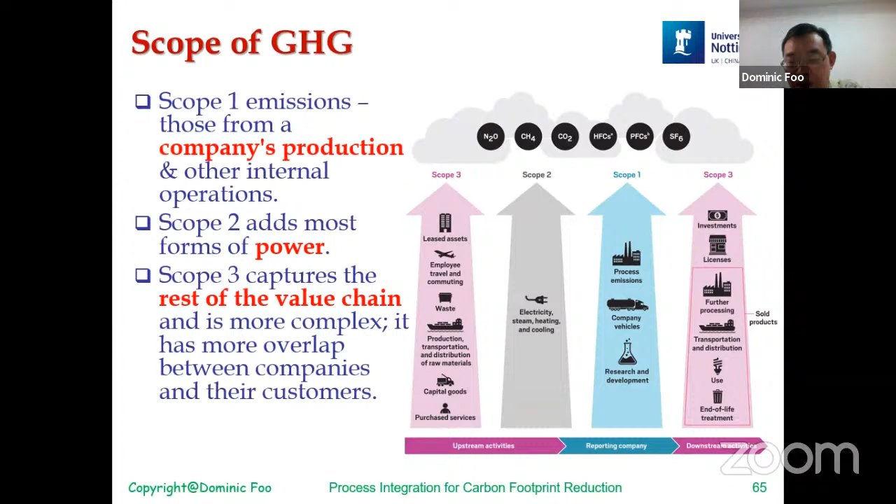And also, before you actually do it, you need to do some simple calculation to check what is the benchmark. Don't compare your plant with another plant. Even though it's the same company, you have a plant in India, for example, or America. Don't compare your GHG emission with the other plant, because your power mix in Malaysia is different from the power mix in India or US. Even though your production line is exactly the same, your feedstock comes from different parts of the world, your electricity comes from different suppliers, and that will contribute to CO2 emissions that are totally different. Even if you divide by kilogram of your product, it's not going to be the same basis. So do your own GHG emission calculation first before you look at how to improve it.

Okay, so that's the thing. Thank you, so probably can stop sharing first.